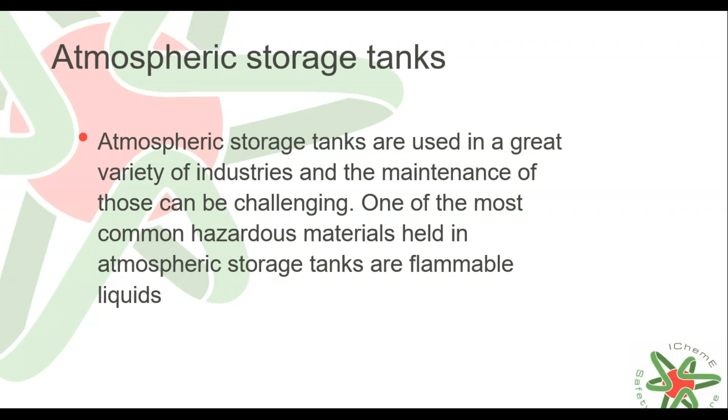As you can see in our safety lore, usually two case studies are addressed and described, and these are short descriptions of the cases, highlighting some of the key learning points. And then the second page of the safety lore tackles and provides tips and recommendations for managers, process safety engineers, supervisors, and operators, so that they know what they can do to avoid such accidents occurring

in the future again. Now, some of you asked that I should put some pictures in the webinar material, so here you are. In fact, the safety lore document doesn't contain any pictures because you can find all these pictures on the internet from different sources of information.

Now, the two cases. The first one occurred at a wholesale and retail facility. An explosion occurred in 2001. Two contract workers were carrying out maintenance operations inside a 5,000 cubic meter atmospheric storage tank. The closed floating roof tank usually contained premium grade gasoline, but it was emptied for the maintenance job.

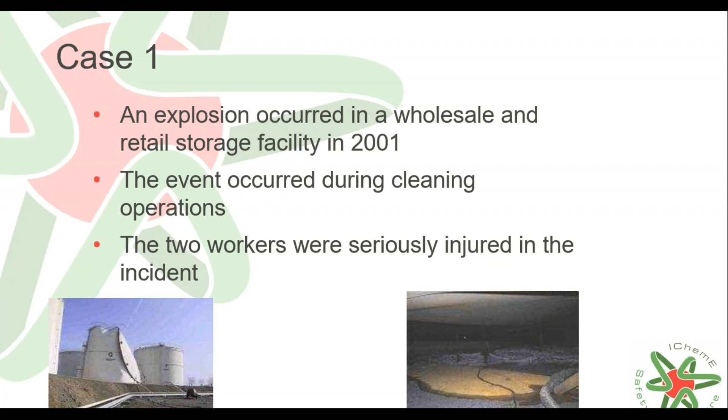The two workers were seriously injured in the incident. The tank afterwards, as you can see in the picture, was not repairable, and the operation of the storage facility was interrupted for approximately two months. So quite a significant time that you can't run your plant.

Now let's come to the points. What are the key learning points from this case? The distance of the floating roof from the tank bottom at the time of the accident was approximately 1.2 meters. The working space, therefore, in this situation was quite limited, as you can imagine. The empty tank that exploded normally contained premium grade gasoline. Now, the gasoline vapors still in the tank caused the explosion.

The tank was equipped with only one manhole. That was another aspect. And apparently when the incident occurred, not all the vents were open. It is likely that the atmosphere was not homogeneous, and explosive pockets of vapor and air also existed within the tank. In addition to that, the ventilation system set up to evacuate gasoline vapors was shut down for the cleaning operations to take place. So these are the initial key learning points.

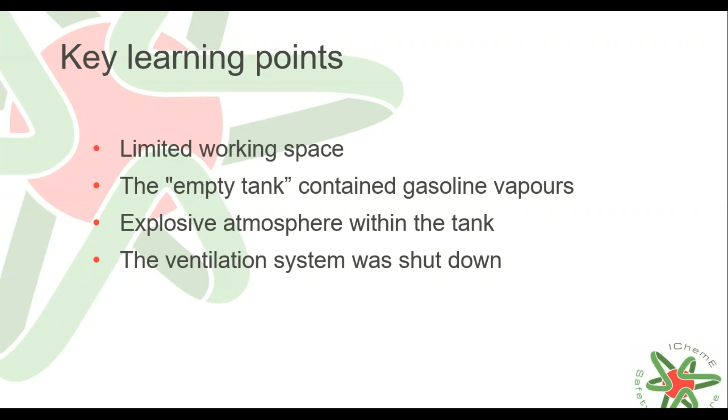But what else happened? What is also not always recognized is that gasoline collects in welds, pontoons, or floating roofs, particularly if they are not well maintained, in small pits and crevices on the surface of the steel, and within the residues on the tank floor. This means that there is a continual production of vapors even after the tank has been emptied, which means that explosive atmosphere measurements need to be regularly repeated, as well as constant ventilation.

Now, this is an aspect that I will be covering in one of the later safety lores that I publish. And so you will also see some similar cases where you can find key learning points that are quite similar to these cases, but that is normal because you can find similarities in different incidents, depending on the aspect that you try to address in that particular analysis.

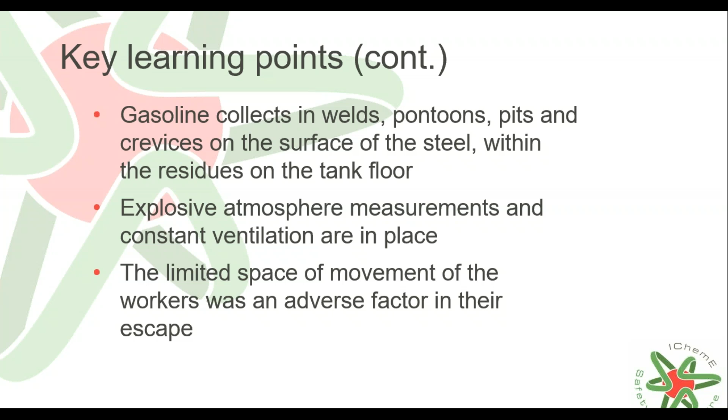What also happened was that the limited space of movement of the workers was also an adverse factor in their escape. This will also be addressed in the shift handover and permit to work safety lores in the future. So briefly, this is what happened in the first case, and now let's see what happened in the second case.

And we also already have some questions and comments, which I really appreciate. So thank you so much. It is really useful. So I would like to read it now, because normally I don't, but this is really interesting, what we have received.

So also important is to use spark resistant tools and only allow entry while the lower explosion limit meter shows zero. When the intent is to enter the tank to remove residual material, it should be done under very close and strict supervision. These days, robots are available for executing such jobs. Really interesting and really useful comment.

Thank you so much. And in the end, when I present the What Can I Do session, I will try to gather some more recommendations as well, not only related to these two cases, but in general from the different sources of information.

Let me just give you an example here. So for instance, the Energy Institute published really interesting guidance documents on cleaning operations and atmospheric storage tank maintenance activities. The UK Health and Safety Executive published many guidance documents that are really valuable. The US Chemical Safety Board has published safety bulletins that address these really similar aspects, and loads of

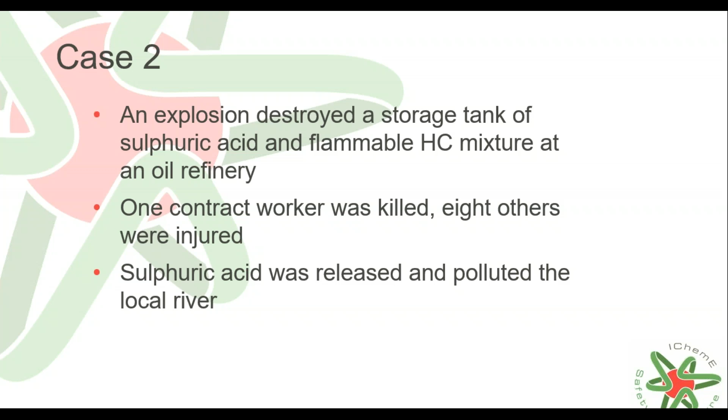And in fact, I just mentioned the US Chemical Safety Board publications and incident investigations, which are really useful. And you can see all the videos that they published on the cases so that you can have a better understanding of what happened. And they released a publication, and in fact I think it was not only one publication but more than one, about hot work activities and contract worker related

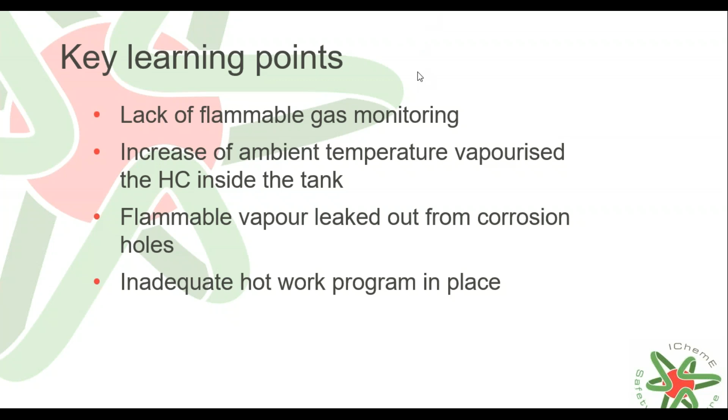The framework is not a safety management system. It doesn't seek to replace any safety management system, but it addresses 6 key areas, which are around one specific and really important aspect, which is leadership. So those are the elements: systems and procedures, engineering and design, assurance, knowledge and competence, human factors,

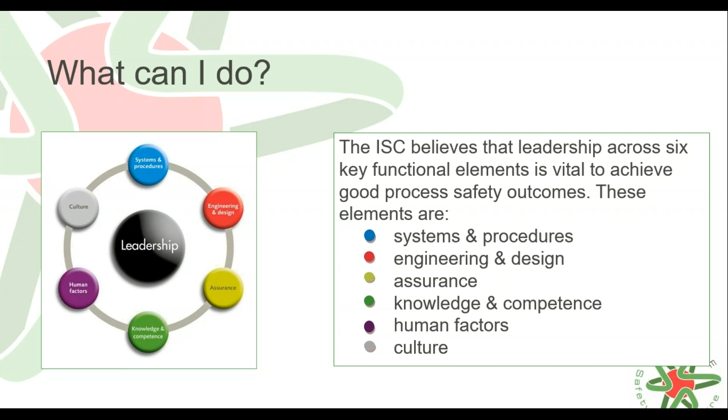So you can get a better idea which topic and which tip actually covers which element of the framework. Let's see, what do I mean by that? What can I do as a manager to avoid such cases to occur during maintenance of atmospheric storage tanks? Safety management system with written procedures should be in place to address maintenance activities along with normal operations. Assurance activities are required to get feedback on the safety management system.

What next? Routine permit to work audit program should be in place with reports, analysis, and compliance key performance indicators. Arguably, field auditing should be increased for specific and large tasks, such as tank maintenance. Contractor selection criteria and competence assurance programs should be in place. Now, this is a really, really important one, because let me explain.

The IChemE Safety Centre has published different guidance documents that are practical guidance documents, short and straight to the point, and they can be implemented very quickly with a gap analysis within your operation. And one of them addresses competency, knowledge and competence.

One of the competencies within any organization is the recruitment process, the recruitment and selection criteria of contract workers and supply. And it is really important that at least a basic understanding of process safety is required from the recruitment team. I would like just to highlight that it is covered by our freely available publication from our website. Coming back to what can I do as a manager, and sorry about this extra information, but I would like to give you as much as possible.

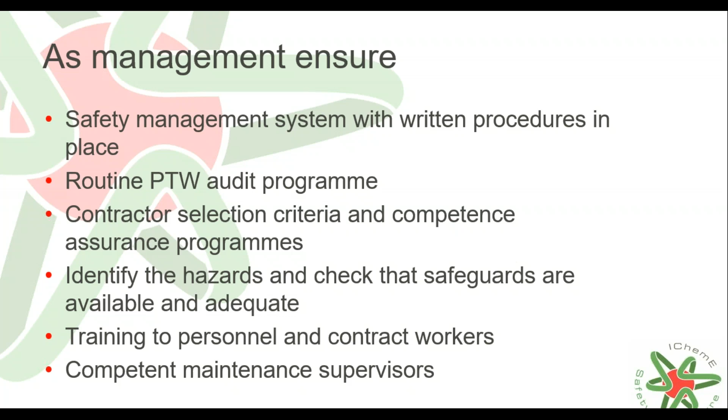Coming back to this publication, what can I do as a process safety engineer and or a supervisor? When issuing a permit, make sure that all hazards specific to the task are identified and that methods of hazard control are in place. Also make sure that operators learn about the hazards and the control measures. And I would like to highlight again that a later Safety Lore will address permit to work cases and learning points from permit to work systems.

In addition to the permit, job-specific task risk assessment is needed for higher risk activities. Any deviations from these systems must be risk assessed prior to execution. Supervise and control the work. Check that the procedures are always followed. Talk through the repair procedure with the workforce before issuing a permit to work. This is a key aspect.

Communication, talk through, ask questions, and get feedback whether operators understood correctly what is going to happen, what are the hazards, what are the safeguards, and what they can and what they cannot do related to that particular activity. And please stay there and supervise their work. Process isolation and preparation plan should be clearly documented. Make sure that maintenance work is planned and integrated properly with other work to be done.

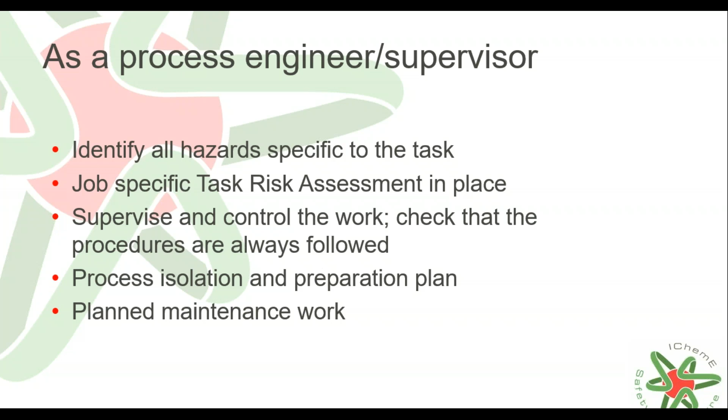What else can you do as a process engineer and supervisor? As I have demonstrated in one of the case studies, the atmosphere can change rapidly. Continuous gas monitoring needs to be conducted immediately prior to and during hot work activities, and this is to ensure that workers are constantly aware of the potential development of an explosive atmosphere. Ensure also that continuous ventilation is in place.

Emergency response plan. Prepare an emergency response plan to enable workers to escape or act upon in case of emergency. Check that all personal protection equipment which is required for the work is present and fit for purpose.

Ensure permit to work is handed back on completion of the job. It must be done person to person. It's not adequate that you just leave the document on the table, on the desk, or wherever, and maybe the next shift will pick it up. Feedback and follow-up are really, really crucial. Be aware that water washing may remove liquid from the tank, but not all the vapors or sludge and scale.

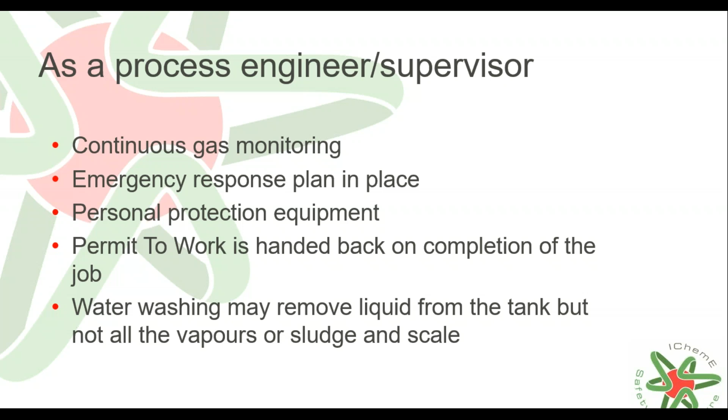This was the aspect for process safety engineers and supervisors. As I mentioned earlier, you may find much more than this in tips and recommendations. I'm not saying that there are not more to tackle, but these are just ideas where you can learn some of the points in association with such maintenance activities. We have a list for operators, so that's what they can do specifically in their job.

Let's see these. These are the key learning points for management, recommendations for process engineers and supervisors, and these are for the operators. They are highly recommended to read all the aspects, not only those related to their activities, because it is better to see the complete picture.

However, with this publication, I wanted to highlight specific areas where operators have to take responsibility and have the ownership, and those are specific for them. However, they should also be aware of some of the aspects related to the management and the supervisors. So it is a cross-learning, basically.

As an operator, make sure that no flammable gas or vapor is left inside the tank prior to hot work activities. Properly test for explosivity, performing gas monitoring before and during hot work. Check that you have a fire watch and fire extinguishing equipment present. And also ensure that relevant personal protection equipment is available, such as breathing apparatus.

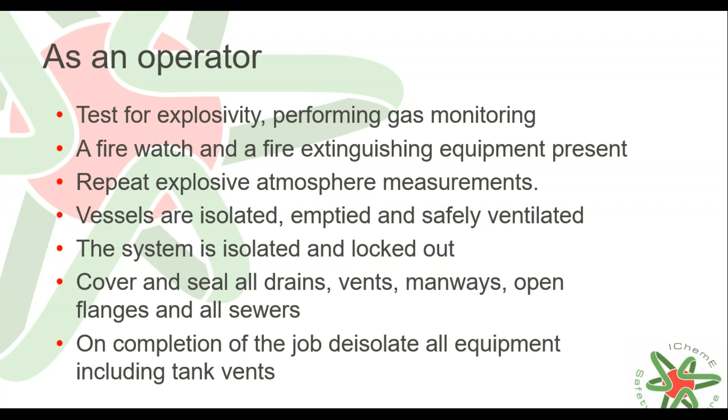So these are the tips and recommendations that I wanted to hand over to you about maintenance activities of atmospheric storage tanks.